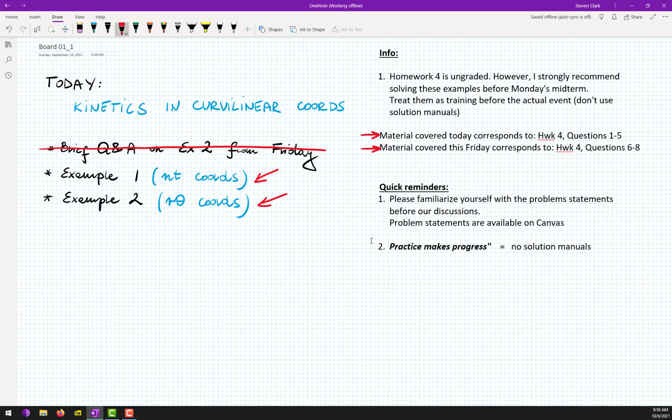Please familiarize yourself with example number 1 before we start our solution.

Okay, so what do we have in here? Look, they provided us a beautiful drawing here. This is, I believe, isometric view. Yeah, this is isometric view.

And at home, I just decided to redraw it in a side view here. This is a side view of that thing. So what do we have in here? We have this construction rotating.

And we have a collar D that is in here, and that collar has a mass. We have some friction between the collar and the rod. We are on Earth, so we have gravity, and they told us to find this velocity, the velocity of this collar, so that the collar does not slide at all.

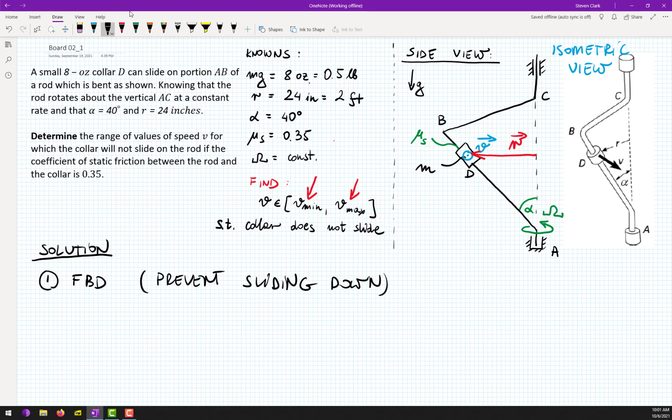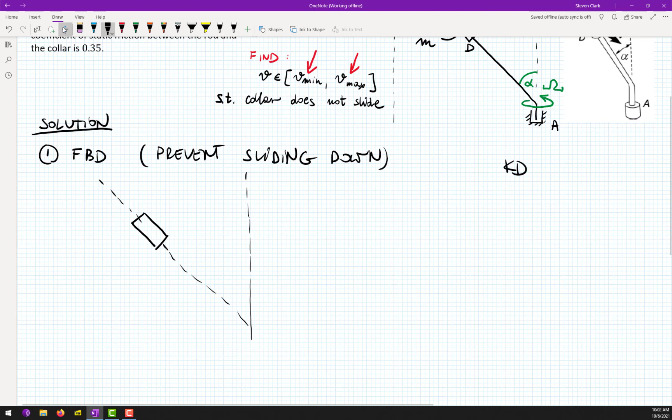Okay, so let's model our collar as such a particle, and that particle is represented here with this rectangle. Two exactly the same drawings here and here.

Okay, so what forces act on our system? This is alpha, and this is alpha, by the way. So I will start, okay? We have mg.

Any other forces act on our collar? Friction, yes, exactly. And which direction? We want to prevent sliding down, so it will be acting this way, right, Isabella? Yeah. There is one more force acting on the collar, Kyle? Perfect, perfect. So it will be this one: normal force.

Okay, I don't want to do it with R. Wait a second, this will be R1.

I think that there is one more force acting on that system. Kyle, you can repeat what you said. Exactly, because that normal force will have two components. Do you see it? The other component will be here. I call it RT. The other component of that force is going to point outside of the board, towards you guys. Do you see it? Yeah.

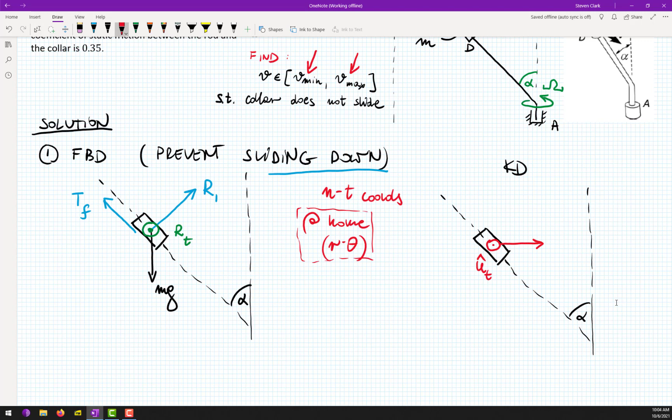But I choose n-t. Since our velocity is pointing this way, yeah, this is our velocity. Don't draw it, okay, don't draw it. Our velocity is pointing this way. So I decided to put ut in this direction as well. Ut is always aligned with velocity, yes. So that means that un will be pointing this way, and this is our k direction.

So that means that we will have MAT, we will have MAN, and we will have MAZ, surprisingly, yeah? So these are three positive directions we are going to express our motion in. Okay, what's the next step?

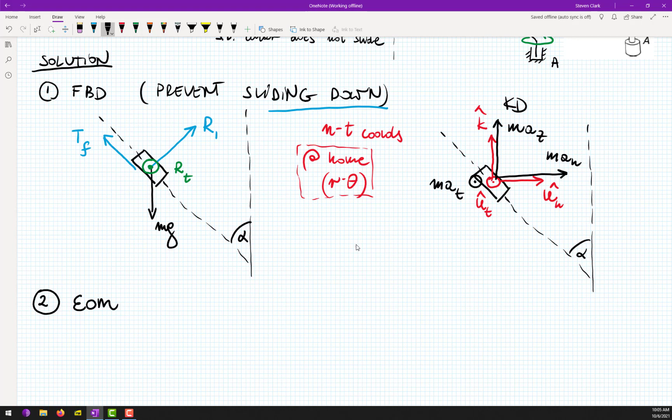EOM, yeah? By the way, this is the recipe to solve these problems: FBD, EOM, and then we will see what next. If you follow that recipe, you will solve every problem in kinetics. Yes, Jason? Yes, yes, yes.

Sum of forces along the t direction, and this is our positive direction. So in here, I believe that we have only one force acting there. We have only RT, and this is equal to MAT. That's it, yeah? Now, sum of forces in the n direction, and I believe that we decided that this is positive direction, right? So what do we have in here?

Oh no, we have to do some projections, yes? Okay, let's do it quickly. RT will be here, let's do orange. So I want to project this guy here, okay, on these two components.

So if alpha is in here, I believe that alpha will be also here. No, alpha won't be here. Alpha 90? No, of course not. Alpha will be here, sorry guys. So this one will be R1 sine or cosine? Which one? Yes, you didn't. Come on, man, you must know, you must learn that. R1 sine alpha. Yeah, guys, make sure that you know which one is sine and which one is cosine. Okay, it's high time to learn it.

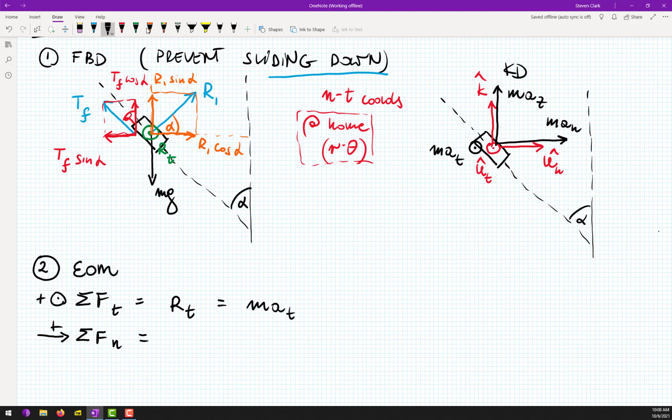So now we are ready to write the equation of motion for the n direction. I believe that R1 cosine alpha points in the positive direction, and TF sine alpha points in a negative direction, and this will be equal to MAN.

And now FZ, with this positive direction, we have R1 sine alpha plus TF cosine alpha, and we have also negative mg, and this will be equal to MAZ. Okay. I like when these guys are aligned.

Okay, so we are done with our equations of motion. However, you guys should recall that A can be expressed always in such coordinates: AT ut plus AN un, right? And just to remind you that AT is equal to dV/dt, and AN is equal to V squared over rho. Okay?

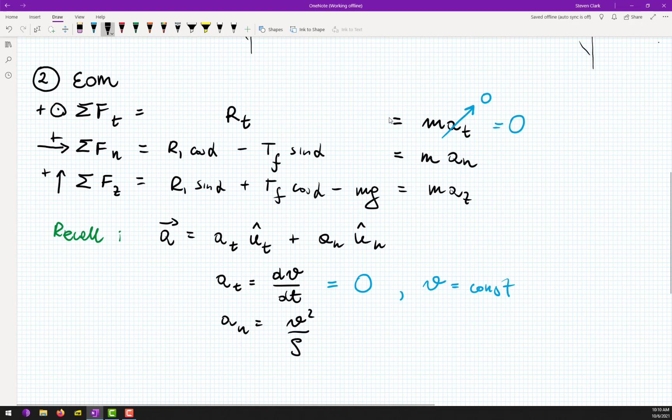So, you guys maybe can already tell me that this is 0, right? Because V is constant. Yeah, they told us, I think even in the problem statement, that V is constant. So that simplifies the problem because this is 0. And we already can see that RT, that reaction force, will be also 0. Great, first information.

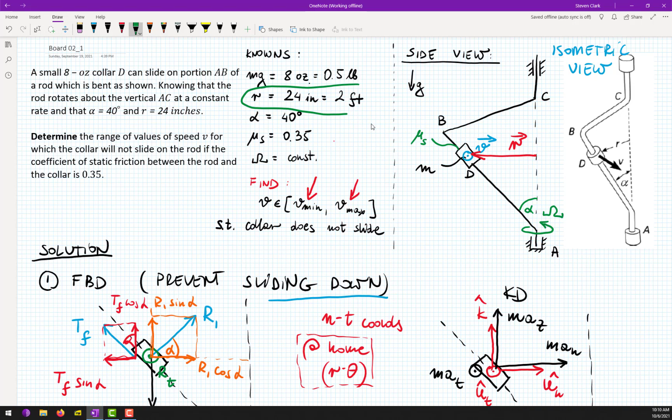We figure out. Okay, now what is rho? Can any of you tell me what is rho? That radius of curvature, if I scroll up the picture. Exactly, it will be 2 feet. So instead of rho, I will just write lowercase r. So rho, it's r, and we know what r is: 2 feet. Great, so this will be v squared over r.

Great, and by the way, as a digression, what is AZ? Why? You said it right, and you said it. Why is it 0?

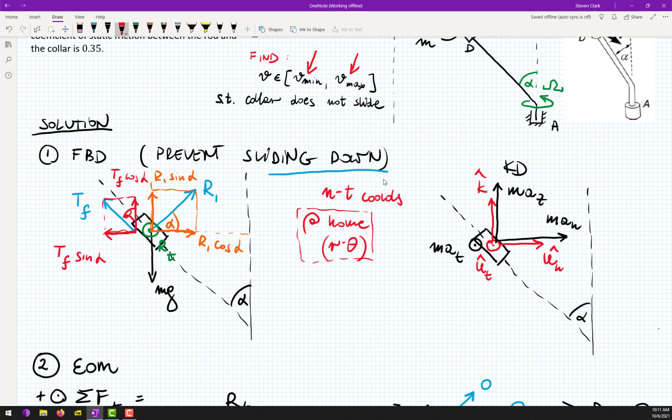Exactly, it is spinning around. Our collar cannot leave this plane, so it does not accelerate this way. It does not accelerate this way either. So this will also be 0.

So this also will be 0. I'm just going to write this comment: the collar does not slide. It cannot leave the horizontal plane.

Okay, great, and we are just going to plug this information here. So instead of M a n, we will write m v squared over r. Okay, let us recap all of these equations. So we'll have 0 here, mv squared over r here, and 0 here.

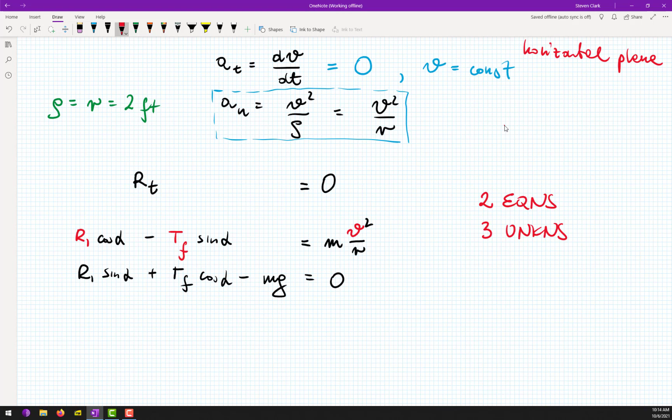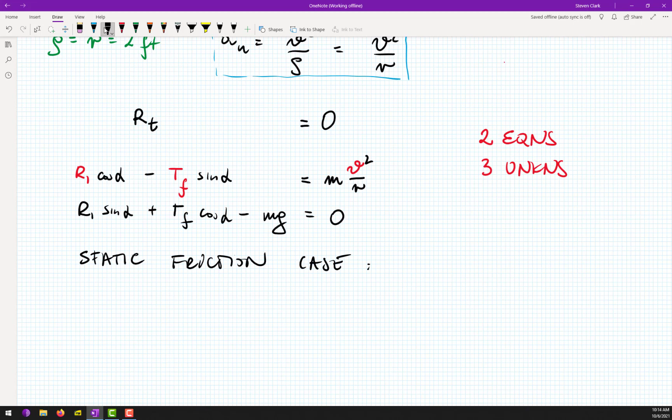Okay, n is a normal force. And by the way, in our case, n is a normal force. In this case, n is equal to the square root of r1 squared plus rt squared. However, rt is 0, as you can see in this equation. So our n will be equal to r1, basically.

Yes, Will? How do you know that's what n is equal to? Oh, that's simple. Just look at this picture here. This is reaction force. Yeah, so it's a negative reaction force. Of course, yes.

That reaction force has 2 components, yes? One pointing this way, the other one pointing this way, so it will go somewhere here, yeah? However, the green vector is 0, yeah?

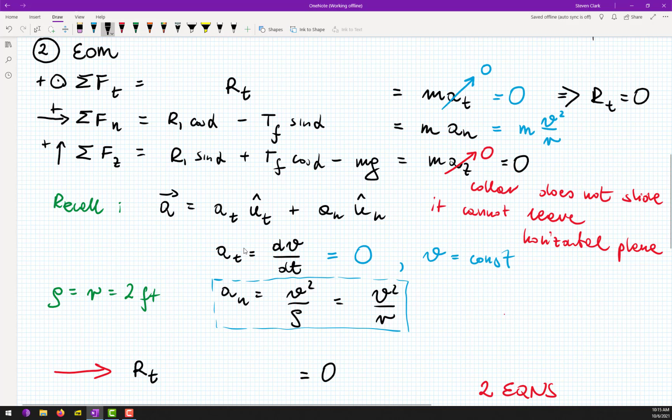Good question, thank you. Okay, and we are not going to use that inequality, right? Because they ask us to go for extreme value of v. Yeah, v extreme for TF max equals mu s n. They ask us to go either for v min or v max, so the extreme value will be right at the sliding. So we're not going to go for inequality, but we are going to go for equality.

Okay, and we are done, we found our third equation. So let me put it here, let me write this one here as well. So TF is equal to mu s R1. Okay, so...

These are three equations, three unknowns. You guys know how to solve it, I am not going to solve it with you. I'm just going to give you the answer.

Okay, so this is equation number one, equation number two, equation number three. If you do a little bit of algebra to equation number two, you will end up with R1 equal to mg divided by sine alpha plus mu s cosine alpha. Okay, and if you plug in values, you will obtain that this is approximately 0.5489 pounds.

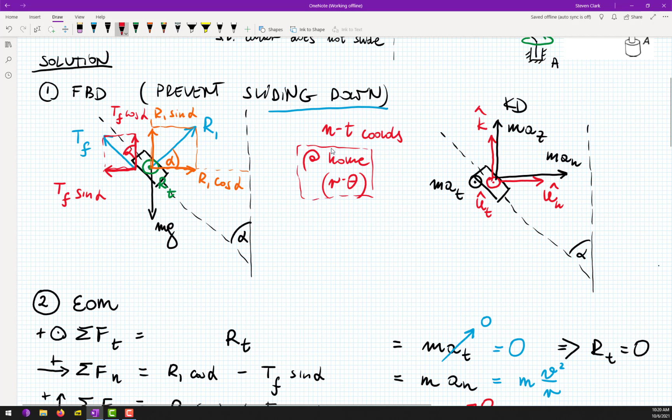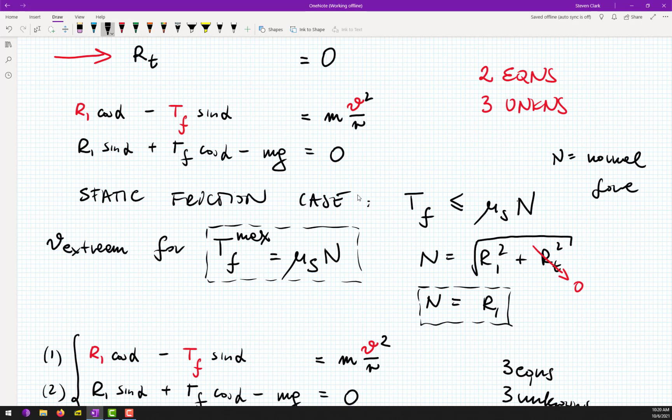Sure, this is the normal force between the rod and collar. Okay, do you see here the blue vector and green vector? Do you see it? So our normal force has two components, right? And n is the magnitude of this vector. So this is how we take the magnitude of a vector, right? We square each component, sum them up, and we take a square root. This is the magnitude of the vector. So what is RT? RT is pointing towards your eyes, towards you, exactly.

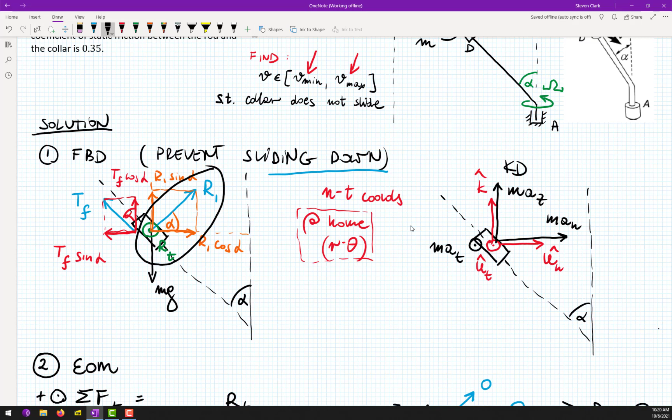Rt is 0 because this value is 0 here. So our thing does not accelerate.

Yeah, that's why that reaction force is 0. This equation, look, this equation.

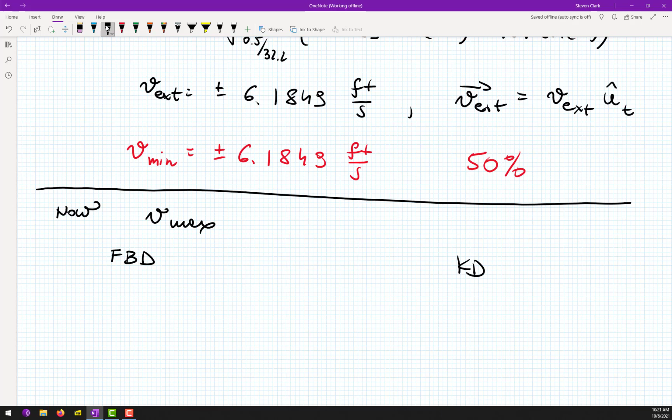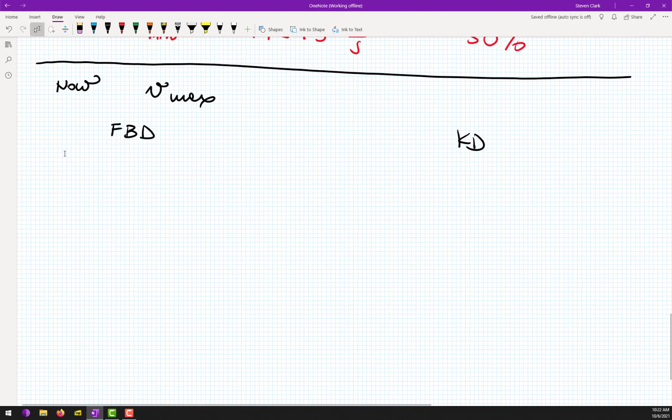So I'm going to copy them, just to save some time. I love that I can copy those pictures. You know, before I was using... I know you don't like it, but I like it, because you probably prefer me to write everything on the board, so that you have enough time to write it in your notebooks. However, I love that I can copy things because I don't have to redraw it and so on.

Okay, guys, so there will be only one change between what happened earlier and what will happen right now. So far we found V min, and right now we'd like to find V max.

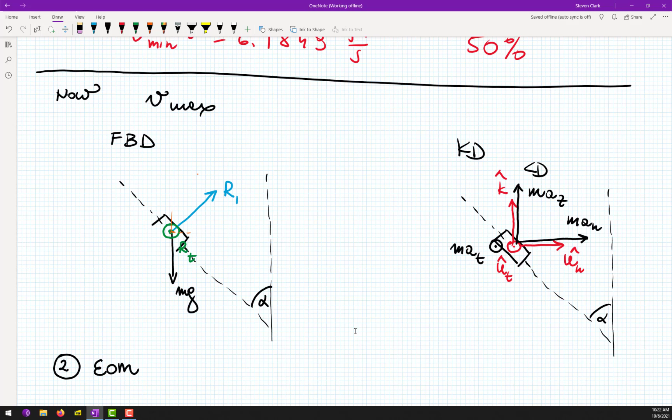So only one force will flip. Which one? Exactly, yeah. So friction will be pointing the different way, the other way. So friction will be pointing this way right now. Exactly, and everything else is the same.

Okay, everything else is the same. So you guys can again project these forces here and here. Alpha was here, so that would be R cosine alpha, R1 sine alpha, and now our TF. I'm just gonna move mg somewhere else. I'll move mg here, and now this TF.

So if alpha is here, alpha will be here, right? So this will be TF sine, and this will be TF cosine alpha. Okay, that's the only difference.

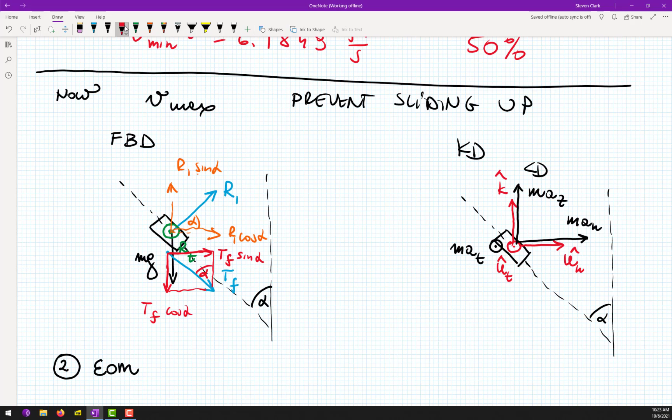So please don't hate me, but I will just copy paste our equation of motion as well. By the way, this will be on YouTube.

I think I can maybe even, let's do everything. I'm gonna copy paste these equations of motion. And the only thing that will change here is just the sign of TF. So we don't have minus TF here, but we will have plus. We won't have plus TF cosine alpha, we will have minus. This is the only difference.

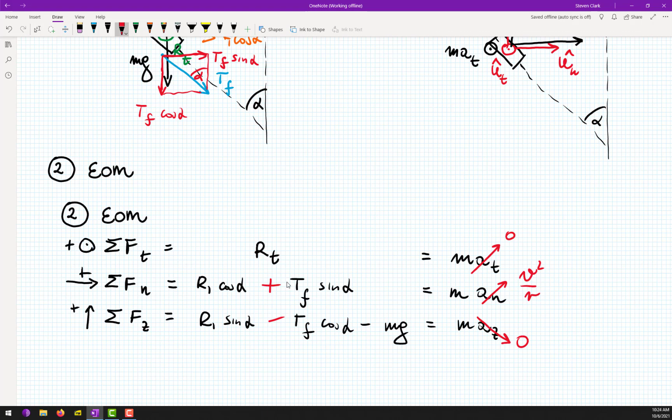And again, you guys told me that this is 0, this will still be 0. You guys told me that this will be V squared over R. It will still be V squared over R, and this will again be 0. And again, we have static friction case.

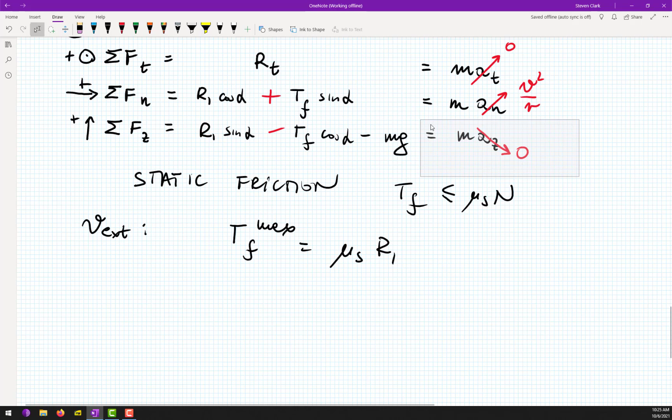Static friction: TF lower equal mu S N. So our TF max for V extreme, we obtain TF max equal to mu S R1 again. Okay, and we end up again with two equations with two unknowns. Here, we end up with this again.

So I'm just going to flip these signs. This will be plus, this will be minus. And okay, find R1.

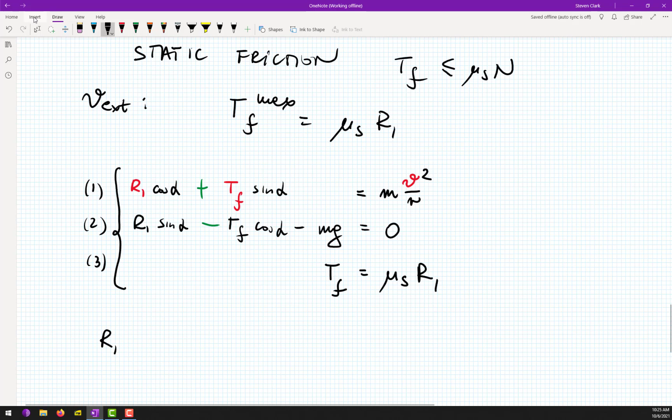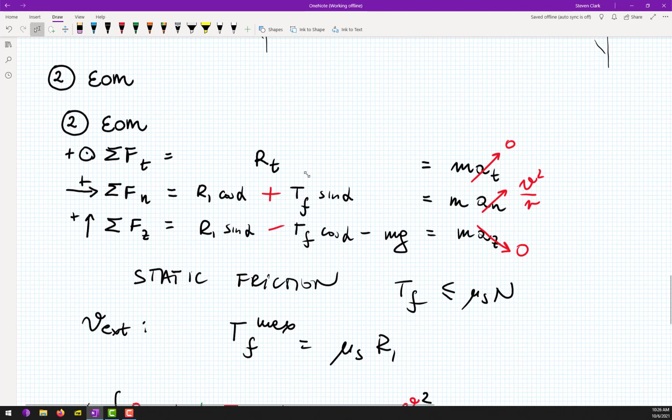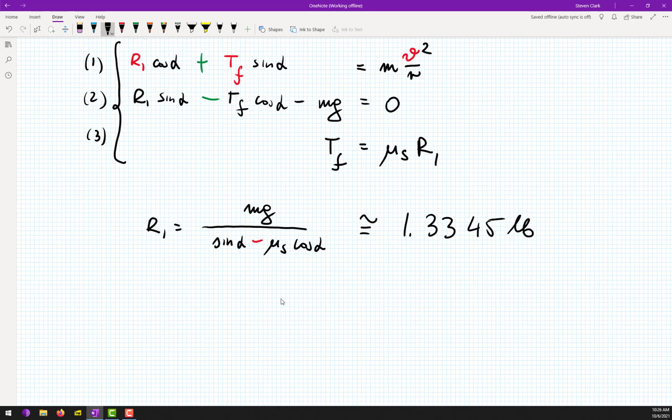R1 will be exactly the same quantity, just instead of plus in here, there will be minus. Do it at home, there's no sense that I'm gonna do it with you in here. Just minus here. Grab your calculators and plug in values, and you will obtain that this is approximately 1.3345 pounds.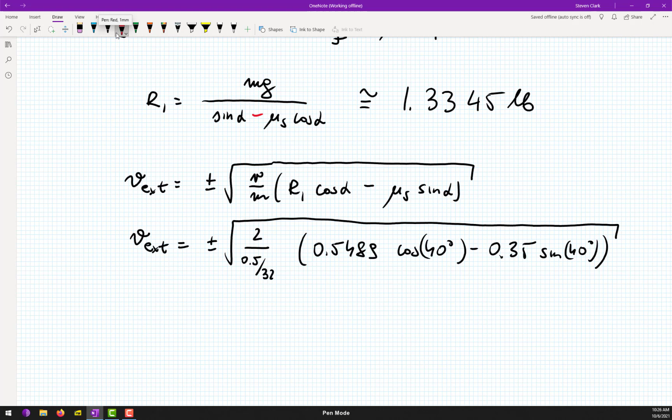And now our V extreme will be exactly the same value again, with one caveat, and you already know what that will be. Instead of minus here, we will have plus in here. Grab your calculators and obtain that our V extreme will be approximately plus minus 13.0514 feet per second. Okay, this is our Vmax.

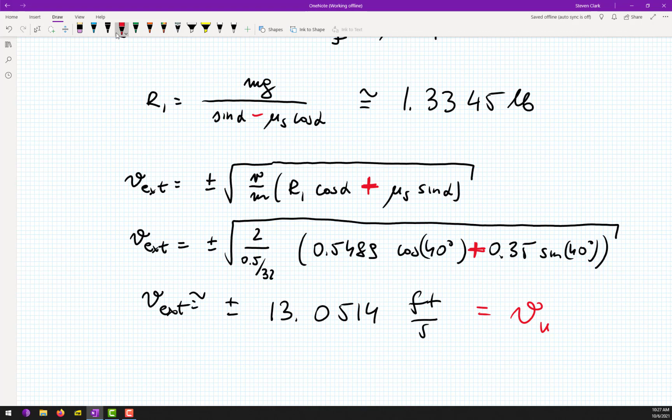And this is our solution. Answer?

V belongs to 6.1849 to 13.0514 feet per second. This is our range of V to prevent sliding. Questions?

I have one question. Why do we have plus minus here? And what does this mean physically? Exactly. It can rotate either this way or the other way.

Perfect. Okay, guys, honest question: do you hate me that I copy paste? A little bit, at least? Please. Okay Tom, this is your last discussion here, you're not allowed here on Friday. No, I'm kidding. Sorry, but do you really prefer me to again repeat the same sentences? You will fall asleep in here. So just, you have notes already at home, just rewrite everything, or if you want to - you don't have to, nobody to tell you that. And just replace that little minus with a little plus. That's it, I just want to sell a concept here.

Okay, so part B, part A. What's the difference? Friction flips. Okay. Questions, or example number 2?

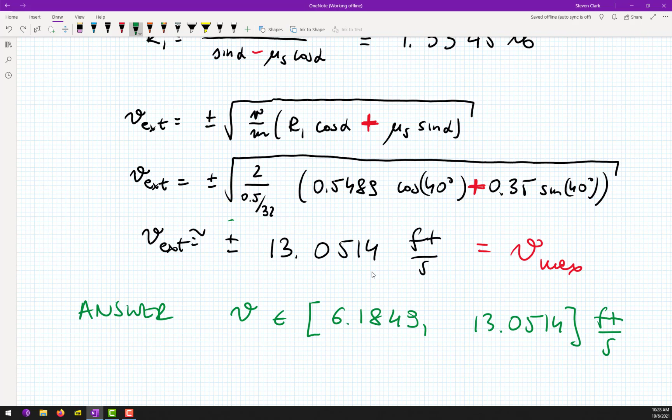Cool, thank you guys, thank you for being so understanding. We have only 50 minutes. I can stay here longer, but you cannot. So let's do that copy pasting maybe more often even.

Okay, please familiarize yourself with the problem statement before we start our solution.

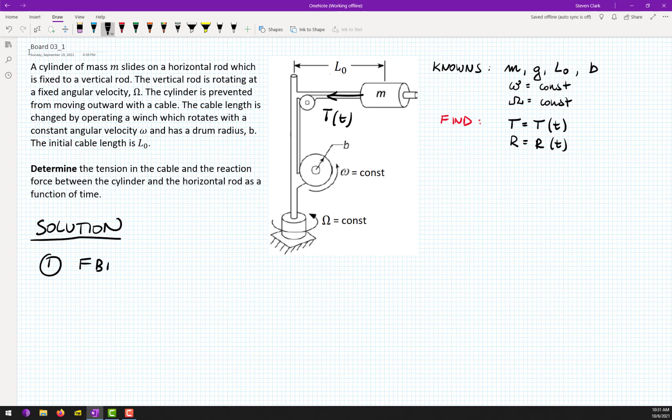Okay, questions? I'm not going to surprise you guys. FBD, okay, and KD of course. So we are going to represent our particle as this rectangle.

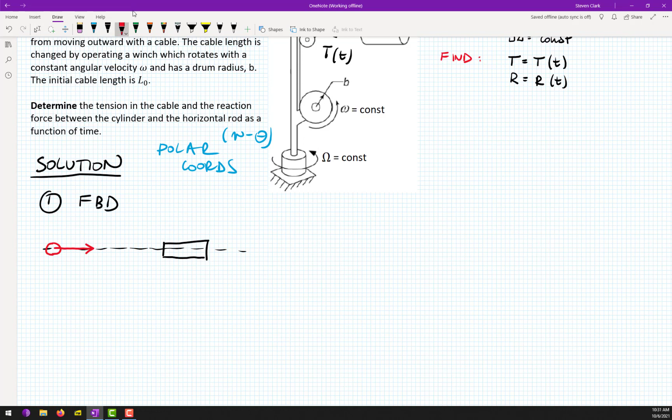Okay, and let's express it in this coordinate system. This time, polar coordinate system, okay? Polar coords, so r theta. So we will have, I believe, UR is pointing this way. Yeah, because our position, I would like to place, by the way, let me scroll up the board. I will place this coordinate system here, okay?

So that would be UR. Because do you remember, UR is always aligned with R, with the position vector, yeah? So our R will be here, this green vector. So that's why UR is here. So if UR is here, U theta will be pointing this way, inside into the board, okay? And K is old good K, okay? So U theta will be pointing into the board. Oh sorry guys, not UT, U theta, yes.

U theta, and K will be pointing up. Okay, so what forces act on our thing? I like easy questions and easy answers. So I'm gonna start mg. And what other forces act on our thing? Already mentioned tension in the cable. And normal force, which again has two components, yes? So we have Rz and R theta. Normal force again has two components. Okay, we are done with our FBD.

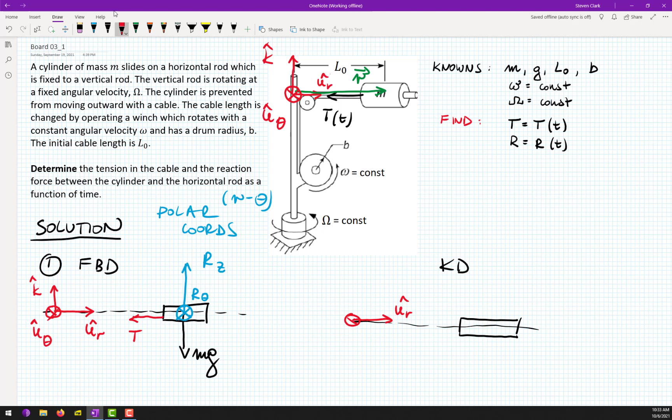Now, kinetic diagram. Let's show all the inertia forces acting on our particle, which is easy after you define the coordinate system. UR, U theta, and K. Okay, so I believe that we will assume that this is positive direction. MAR, MAZ, and this will be MA theta. Great, we are done with FBD and KD.

Any questions to what happened so far? I have a strange feeling that I'm talking too fast, guys. Have I lost you today a little bit? No, everything is fine, yes? Yeah, nobody's looking at my eyes besides you, sir.

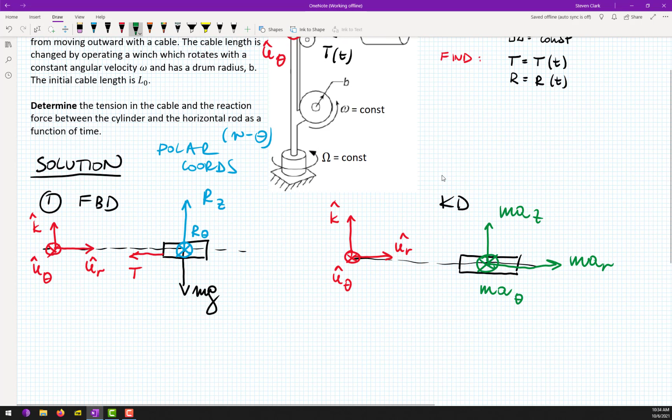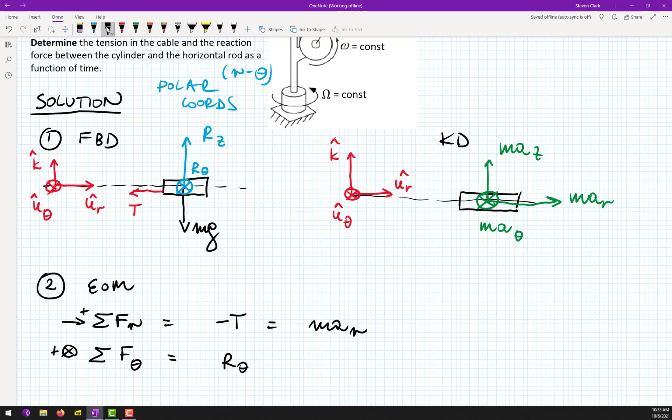Yeah, okay, sorry. Okay, second part, EOM. Of course, not third part, but second part. Okay, sum of forces in the R direction, and this is positive direction. So in here we have just minus T, minus T is equal to MAR. Now, sum of forces in the theta direction. This is positive direction of theta. So in here we have only R theta, and this is equal to MA theta.

Now, sum of forces in the Z direction, with this direction as our positive direction. So in here we have RZ minus MG, and this is equal to MAZ. Sir, I forgot your name, what's your name? Hamilton? Yes. What is AZ? Perfect, for the same reason.

For the same reason, yes. Our collar cannot leave the horizontal plane. I think I never asked you for your name. Yeah, sorry. So RZ, we already know that RZ will be mg always. Great.

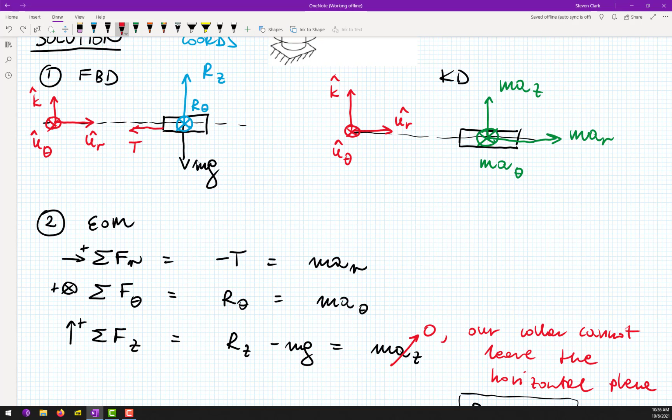Okay, that's it when it comes to equations of motion. I'm going to repeat exactly the same thing I said on Wednesday: these two drawings and these equations have something in common. We must build these equations based on these drawings. I know most of you understand it, but based on past experience, I want to point it out.

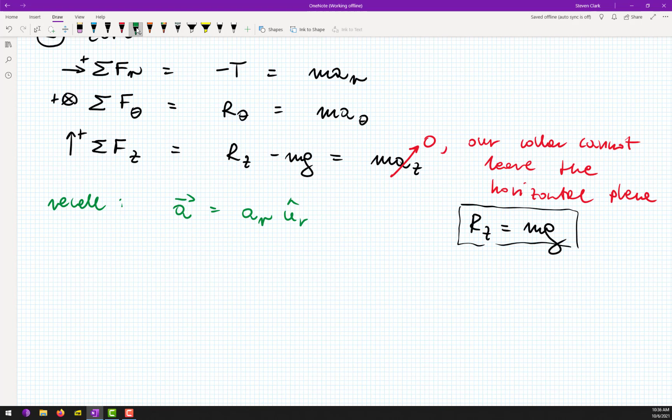Now recall that our A can always be expressed as AR UR plus A theta U theta, where AR, if I remember correctly, was R double dot minus R theta dot squared, and A theta is Coriolis acceleration plus this. Okay, we will basically plug this value here and this value here.

But before that, let's simplify it. So guys, can you please tell me what is R dot and R double dot, and also what is theta dot and theta double dot, based on this picture, based on what they told us? Let's start from easy things. What is theta dot?

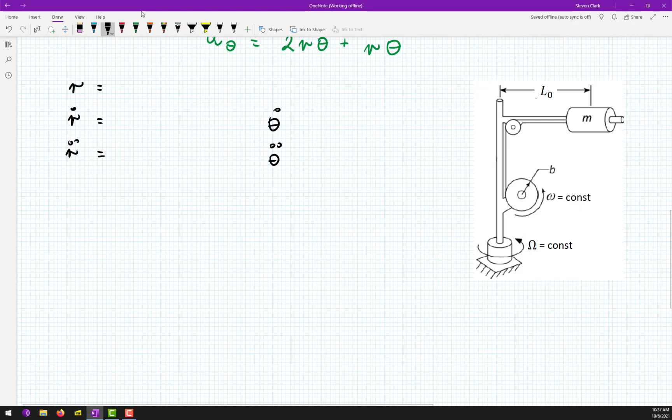Omega, but lowercase or uppercase? Uppercase, perfect, and this is constant. So I don't even dare ask you what theta double dot is, because you'll leave the room—yes, it's 0.

How about this value, R dot? In other words, if this is R, what is the rate of change of this R? What is this velocity? You can speak up.

Omega b, perfect, yeah, lowercase omega. And this is also constant. So this is 0. If R dot is constant, this is 0.

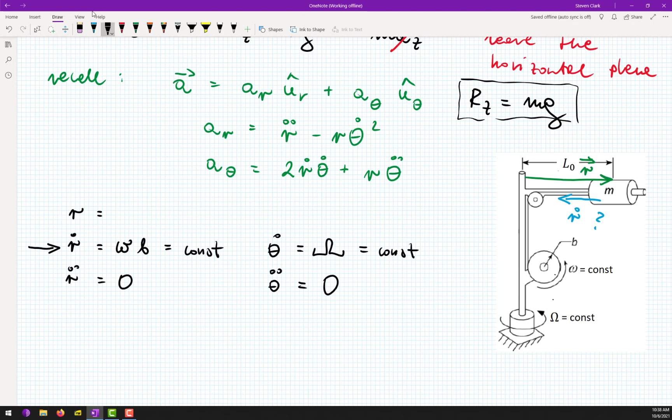And if we integrate R dot, we'll end up with something like L0 minus omega b t. Yep, this is our expression for R. R is a function of time.

So now we can see that our AR is going to be minus (L0 minus omega b t) omega squared, and A theta will be 2 omega b omega. That's all. That's it.

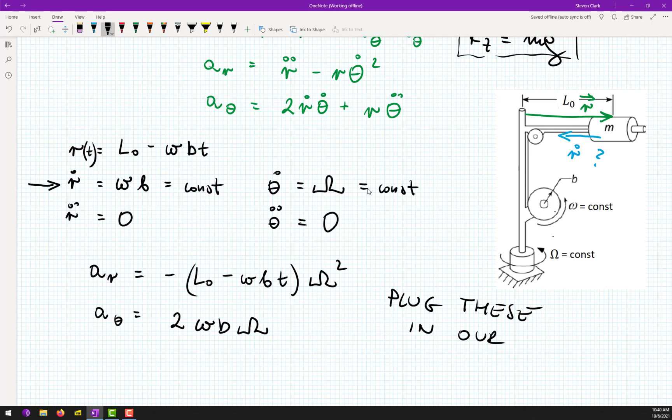Now plug this into our equation of motion. I hope you don't mind if I copy these equations of motion. But instead of AR, I'm just going to plug this one, and instead of A theta, I'm just going to plug this one. That's it. And RZ is mg—the third equation.

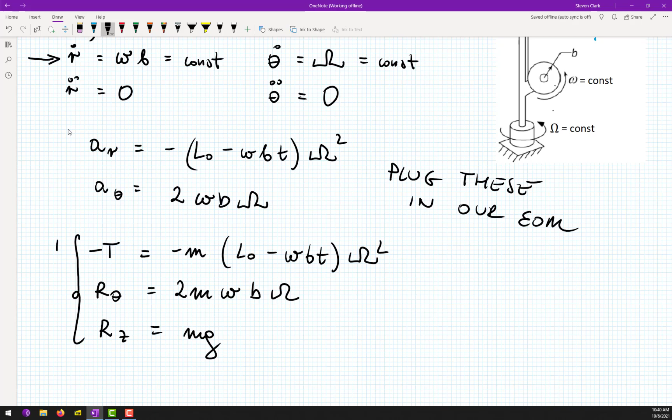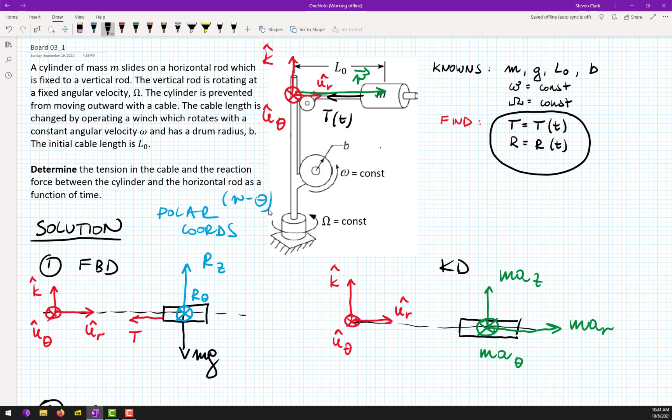So what did they ask us for? I already forgot—ah, express T and R as a function of time. Easy. We already found T from the first expression: T as a function of time is equal to m(L0 minus omega b t) omega squared. They didn't give us values, so this is a symbolic solution.

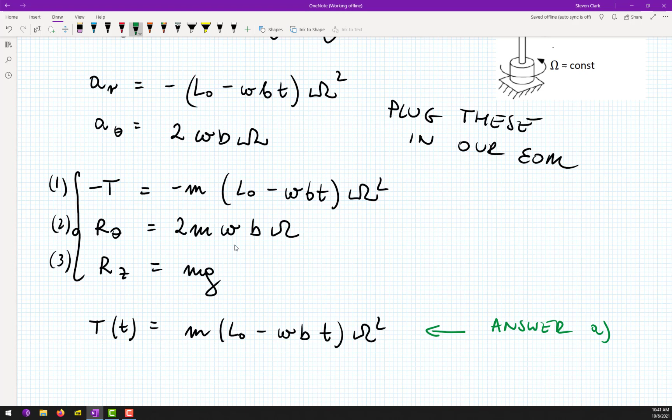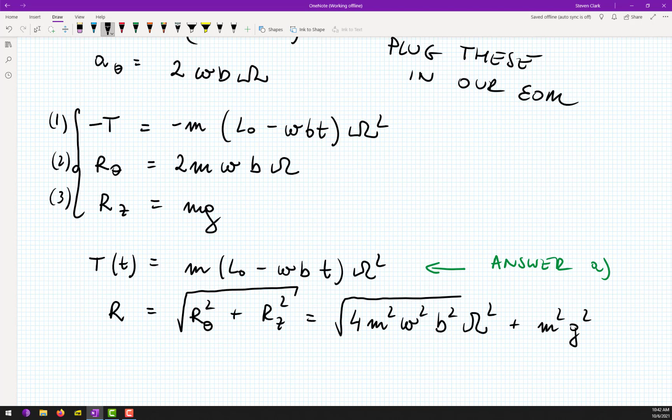Answer part A. And our R, our reaction force, is equal to square root of R theta squared plus RZ squared. That will be equal to 4m squared omega squared b squared omega squared plus m squared g squared. I think we can pull something in front of the square root—m, exactly. So R will be equal to m times the square root of g squared plus 4 omega squared b squared omega squared. Exactly, this is our answer B.

The end of the problem. Questions? Okay guys, so we have 3 more minutes.

I just want to show you that there are steps you should follow in these problems. For example, if you see such a problem on the exam, what should you start with? FBD, yes. I'm going to write it down—this is a recipe. First part: FBD plus KD, and choose a coordinate system. Second part: EOM. Then third part: count the number of equations and number of unknowns.

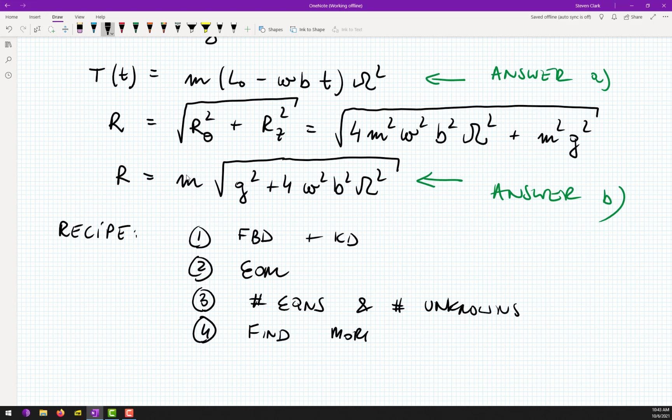99% of the time, you will end up with more unknowns than equations. So fourth part should be: look for more equations. And where should you look for them? For example, friction—friction equations, if there is friction in the system. In example number 2, there was no friction.

And what is the other way? Yeah, John? Kinematic constraint, geometry, kinematic constraint—for example, a rope will give us a relation between two accelerations, of body A and body B. And the fifth step is algebra. Just—wait a second—this is where dynamics stops. Here, dynamics stops here.

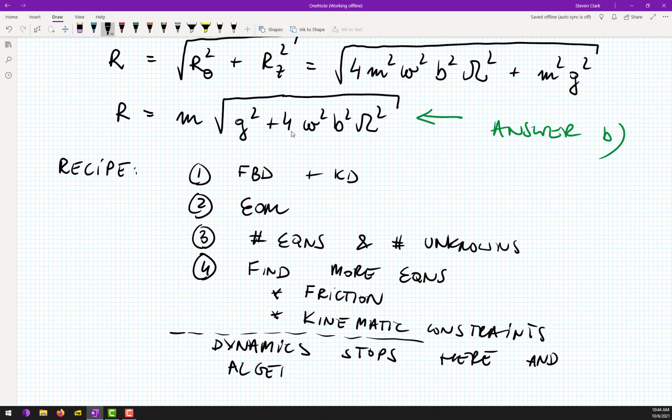Dynamics stops here, and algebra starts. So the fifth point on our list is algebra. I need 10 more seconds, guys. Algebra—just make sure you don't make any mistakes. But even if you make a mistake, I usually don't take points off. What I care about on the exam is this.